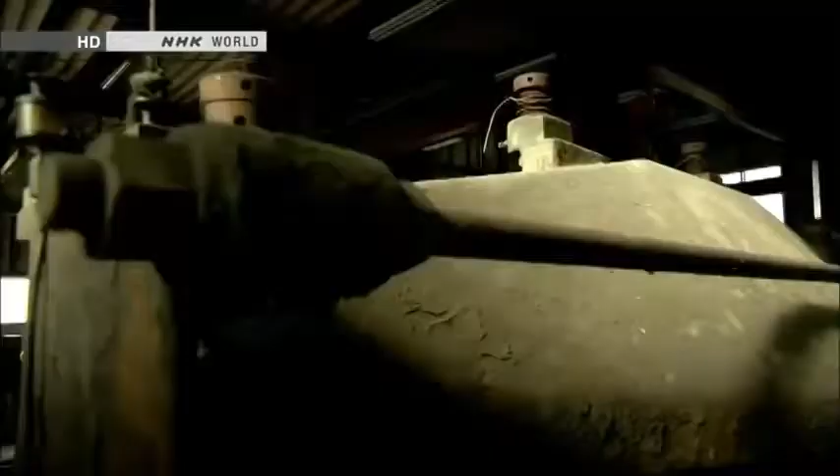In a workshop near Mount Fuji, a curious being has appeared.

It's 3.8 meters tall and weighs 4 tons. It is a giant humanoid robot named Kuratas.

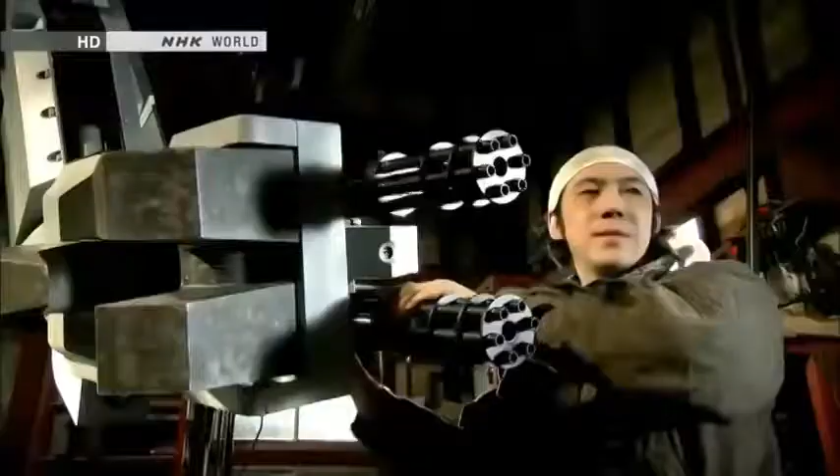Kuratas is a contemporary artist's creation. He holed up here for 2 years, building the robot with input from an expert.

He calls Kuratas a work of art, but it's a sophisticated piece of machinery. A person seated inside can control the robot, move its limbs, and grab things.

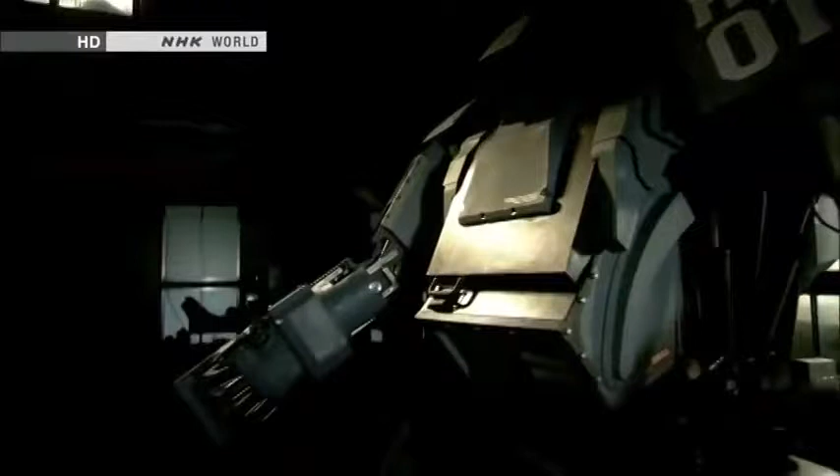The artist says he was inspired by robots in science fiction tales and animation. That vision sustained him as he worked in solitude.

Things that were once unthinkable are becoming real. How will robots evolve? Well, military applications could be one option. They'll probably become more and more like humans. They could surpass us in strength and ability.

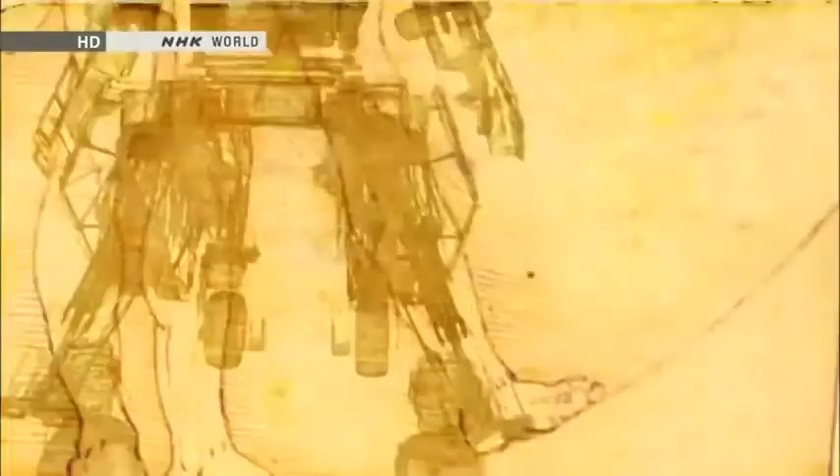People long dreamed of creating these extreme machines. Now, humanoid robots are here.

They think like we do, move like we do, and even sacrifice themselves for us.

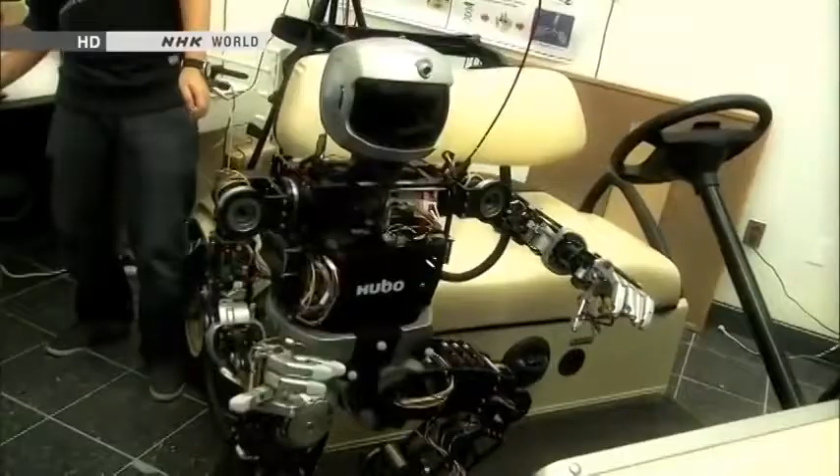We want our robot to change society, because robots must be useful. Electronics and computing, progress in vision systems, there's many pieces of it. We will see much more capability continue to grow.

Since the Industrial Revolution, people have entrusted some jobs to machines.

But there may come a day when humanoid robots do much more complex jobs. Then, what will people do?

And you'll see more and more robots doing things in society, whether it's manufacturing or service applications or home healthcare applications. The key will be skillfully dividing labor between humans and humanoid robots.

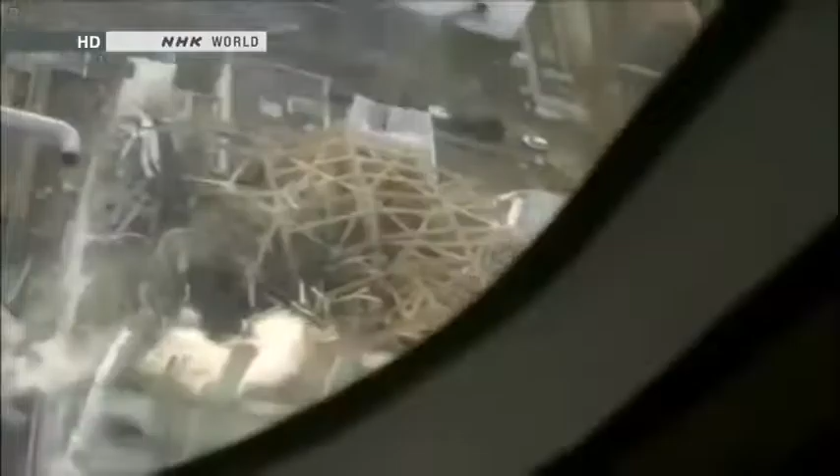The disaster that hit Japan in March 2011 accelerated efforts to develop robots with human traits. The Fukushima nuclear accident left people powerless.

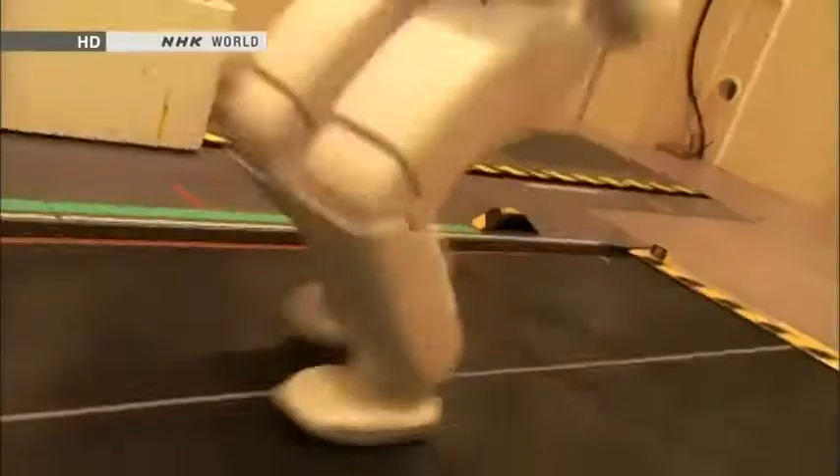Robots can take over when things become dangerous. They can plow through rubble, climb ladders, even make repairs. People are turning to humanoid robots to handle all of these tasks.

We're eager to launch it soon to end the crisis. By joining forces, we can make a truly useful contribution. Only a humanoid could do it. Or the day will come when robots will really assist mankind.

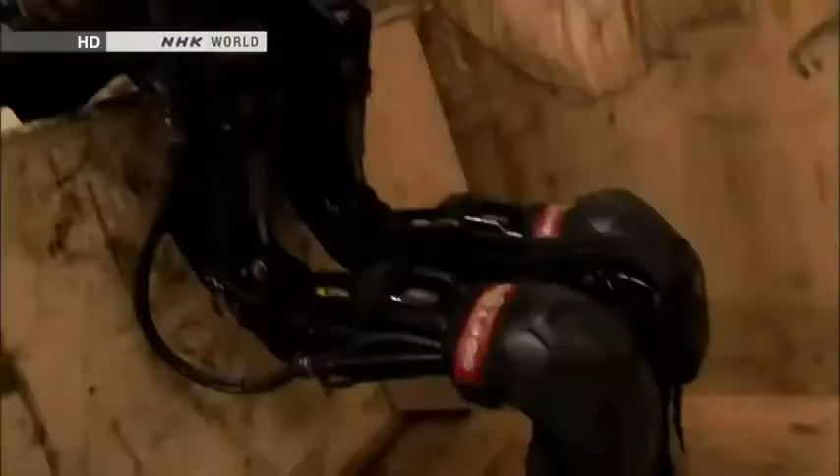The nuclear disaster in Japan sparked explosive advances in humanoids at the front line of robotics development. This program explores the future that's fast approaching.

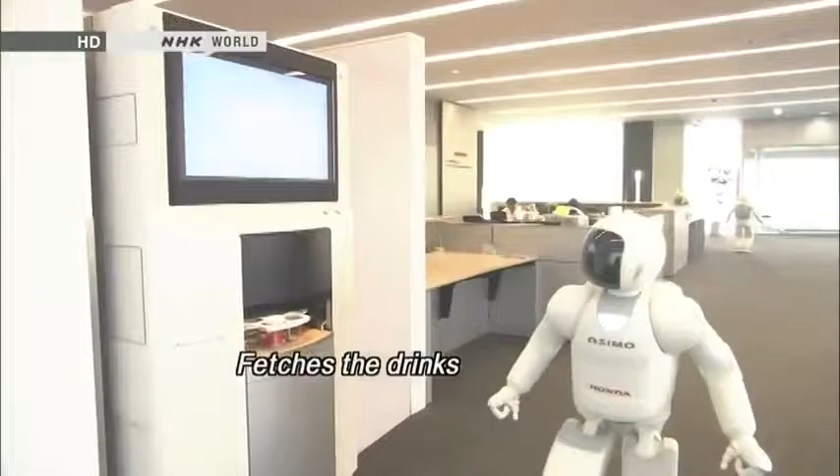ASIMO was created by Honda's research and development subsidiary. We were allowed to film their top-secret robotics laboratory.

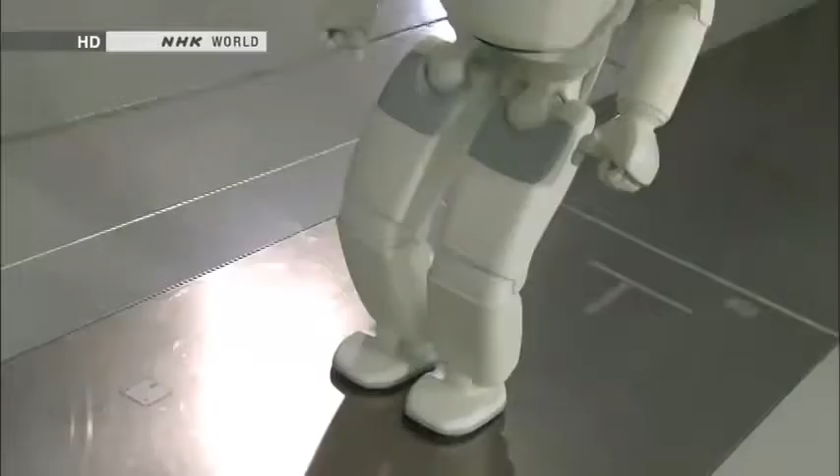Japan is a worldwide leader in the development of humanoid robots. ASIMO is the country's crowning achievement. Engineers continue to make improvements.

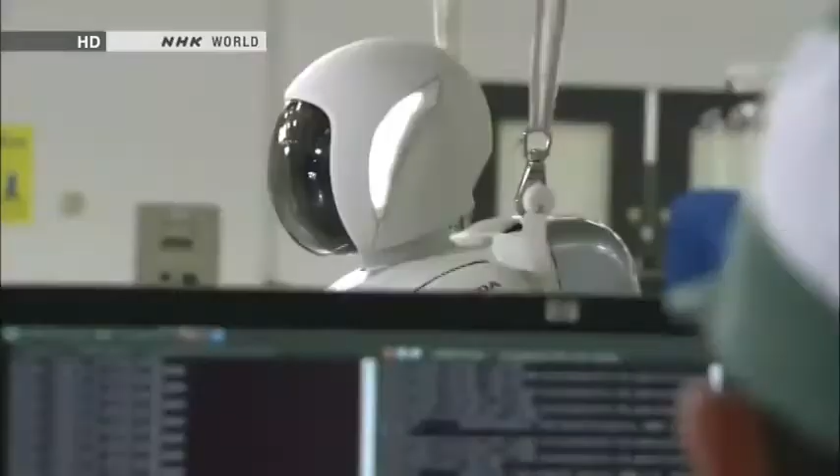ASIMO's most innovative feature is its advanced intelligence. The robot can think and act on its own without human intervention. That's made possible by sensors that replicate our 5 senses.

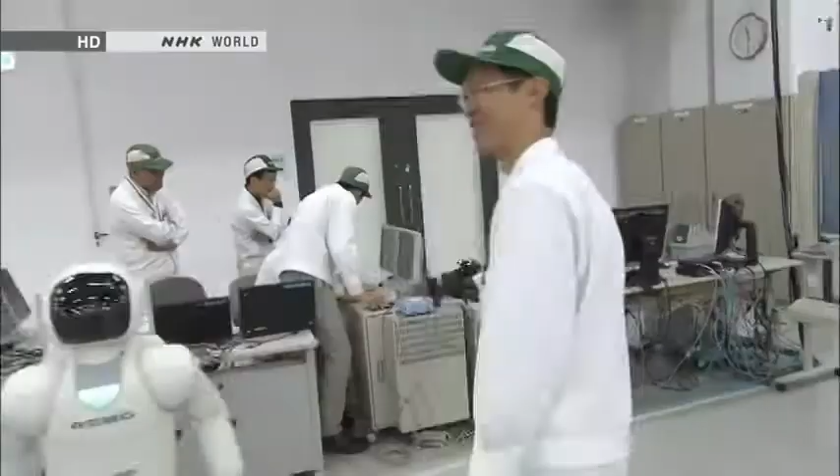ASIMO's head contains 8 microphones. It uses them to listen and engage in conversation. 2 cameras work as eyes. They can detect humans and use stored data to identify them.

A facial recognition problem? I don't think so. Please cover your face.

ASIMO's artificial intelligence analyzes a vast array of information. That's how it understands people's requests and takes appropriate actions.

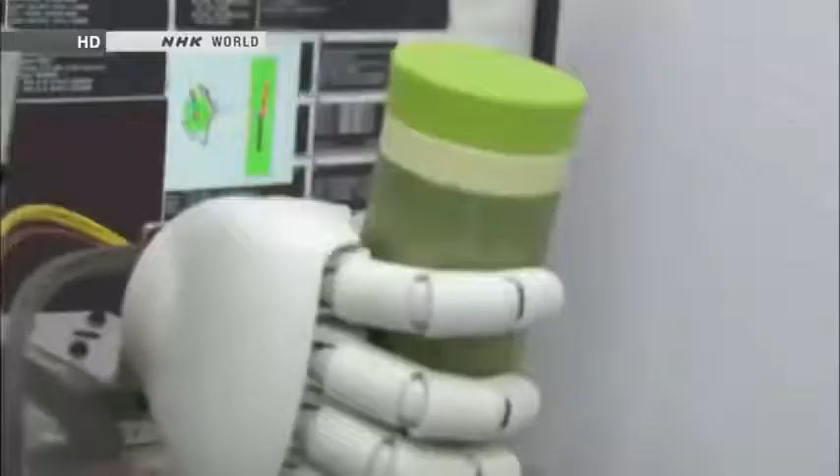ASIMO also has a sophisticated sense of touch. Its fingers can make subtle movements, like a person's. Sensors are embedded in the fingertips, too. They can gauge the hardness of an object, like human fingers do.

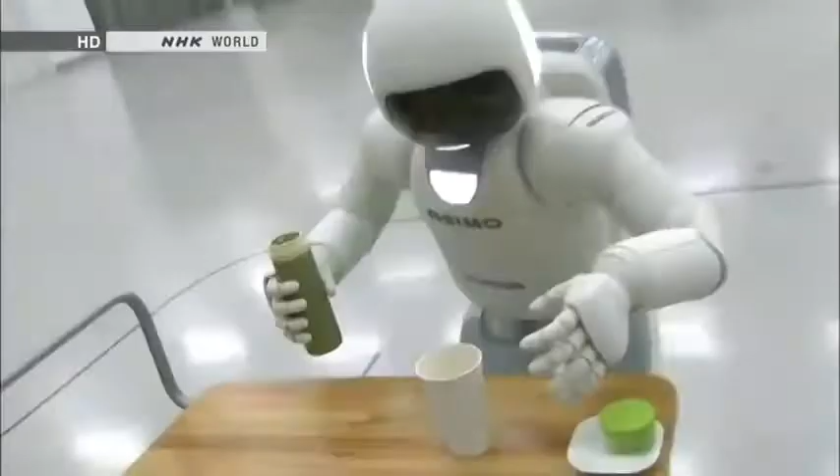Most robots use a fixed amount of strength to grab things. But ASIMO exerts more power to open a tightly sealed water bottle and less when holding a paper cup.

Its artificial intelligence uses information from the fingertip sensors to adjust the grip.

The developer's ultimate goal is for ASIMO to be a valuable partner that coexists with humans.

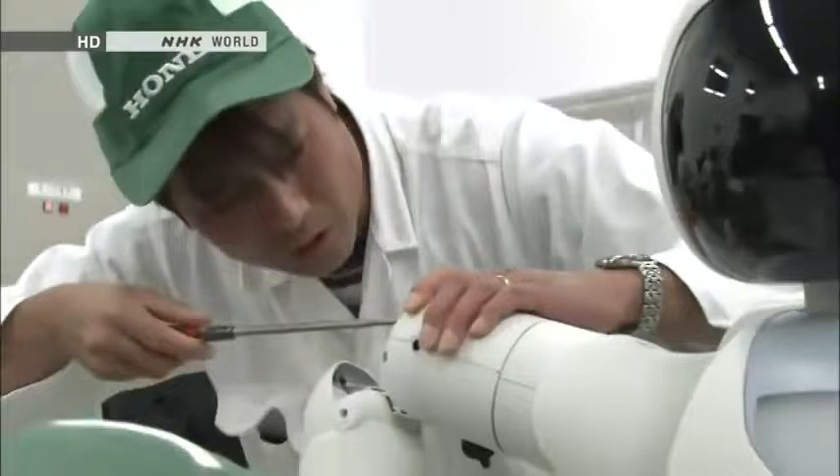The engineers who created ASIMO all grew up watching animated shows about robots, such as Astro Boy, Doraemon, and Gundam. They dreamed of someday making their own.

Satoshi Shigemi is the development team's leader. He has been designing robots for the past 16 years.

From the beginning, we wanted to design a robot that could help people. To realize that dream, we're constantly asking ourselves what kind of robot would be able to change society, make people happy, and make life easier for people around the world.

Our idea is to create a robot that will change how people live. We're working through the technological issues one by one in order to reach that goal.

ASIMO's advanced physical capabilities are revolutionary. The robot can walk and run. It can reach speeds of up to 9 kilometers an hour.

For robots, walking is much easier than running. When running, both feet momentarily leave the ground. Balancing in mid-air is no easy task.

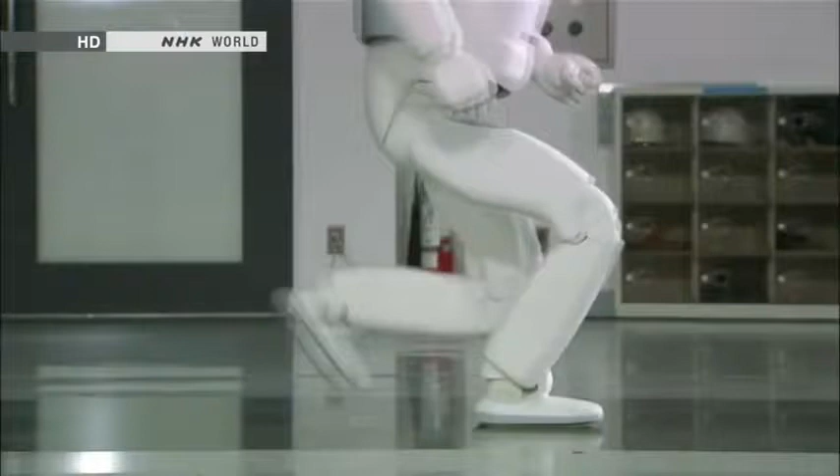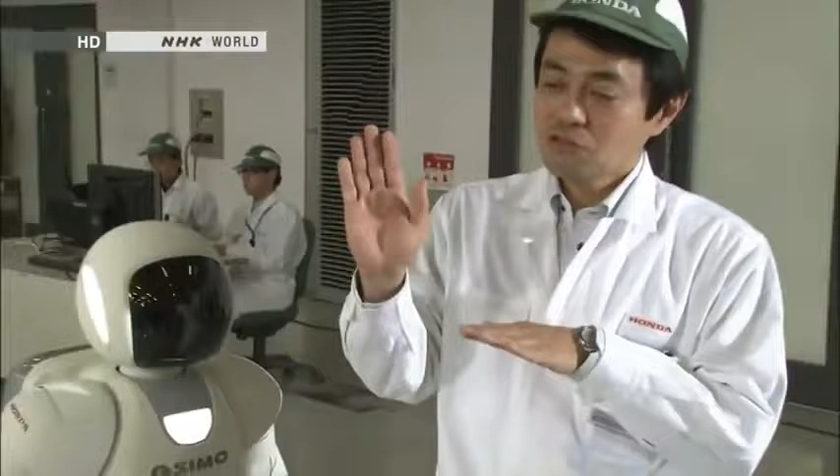Maintaining posture while jumping or floating in the air was a major technological breakthrough. ASIMO leans its upper body slightly forward to maintain overall balance, and goes forward straight in the air.

Sensors in ASIMO's waist measure the robot's angle. It leans slightly to compensate, forward or back, side to side. That's how it stays perfectly balanced in the air.

ASIMO has been evolving ever since development began in 1986, much like a growing child. But something happened that made researchers realize ASIMO's real-world limitations.

It was the accident at Tokyo Electric Power Company's Fukushima Daiichi nuclear plant. The damaged reactors released radioactive substances, making it difficult for humans to deal with the crisis. People needed something that could confront the dangers and bring the plant under control.

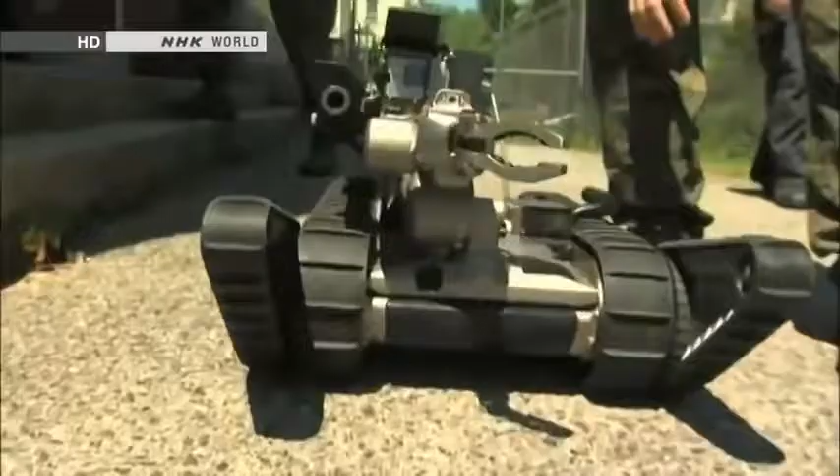Robots. Japanese officials sent a request for robots developed by the U.S. military. The robots were sent to Fukushima in April 2011. They recorded images inside the damaged reactors.

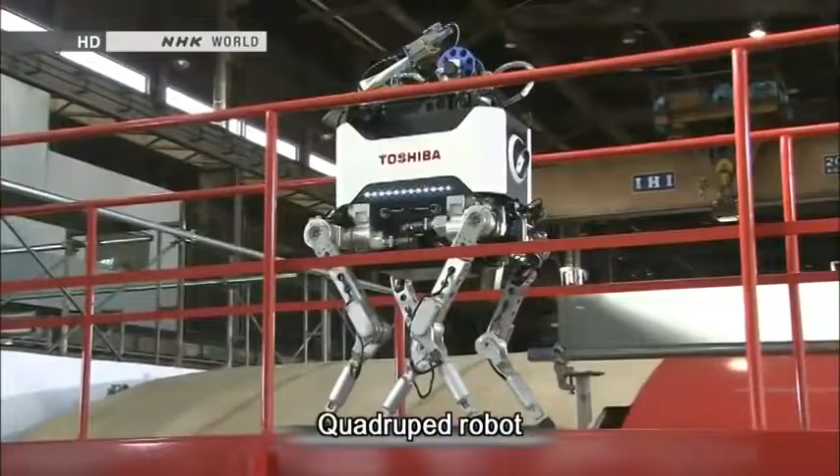Since then, a variety of Japanese robots have been enlisted as well. Robots have proven to be useful, but 2 years after the accident, they're only used for inspections. They're not able to do all the work of humans.

What about ASIMO? Right after the disaster, people flooded Honda with phone calls and emails asking the company to send ASIMO to the Fukushima plant.

But ASIMO wasn't up to the task. It could move nimbly over an office floor and other flat surfaces, but large vertical gaps and obstacles were a different story.

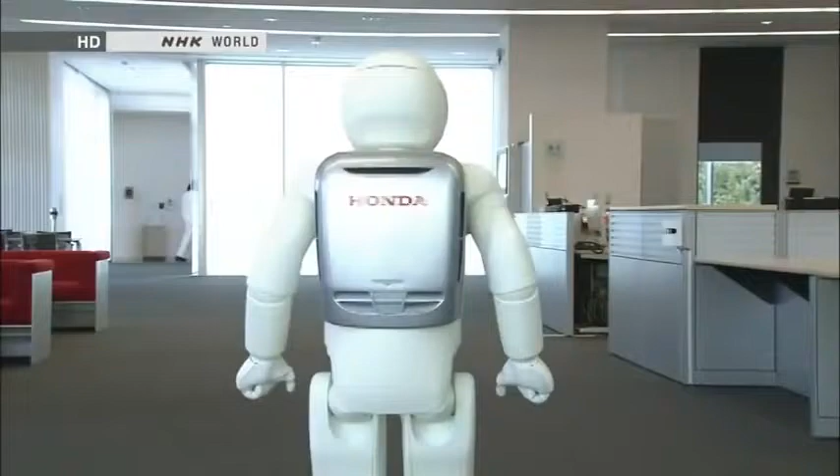We heard from many customers. We ourselves regretted that ASIMO couldn't be of help. It was obvious that the ASIMO we had built wasn't ready for real-life action.

We realized right away that we needed to make something different. Something new that could offer immediate assistance.

Honda wasted no time. Company officials offered to create a robot free of charge to assist TEPCO in the recovery. TEPCO accepted. Officials asked for a robot that could open or close valves inside the nuclear plant.

We wanted to flush out radioactive materials that remained inside the pipes and bring down radiation levels in the facility. That was our first goal.

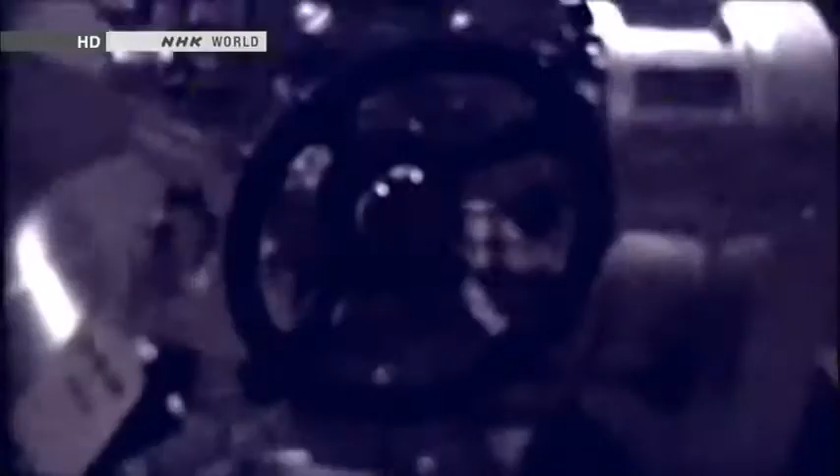Unless we opened or closed the valves, the area would remain highly radioactive, and that would prevent workers from entering the facility, and impact the entire decommissioning schedule.

How many valves are there? Each unit has from several thousand to tens of thousands of them.

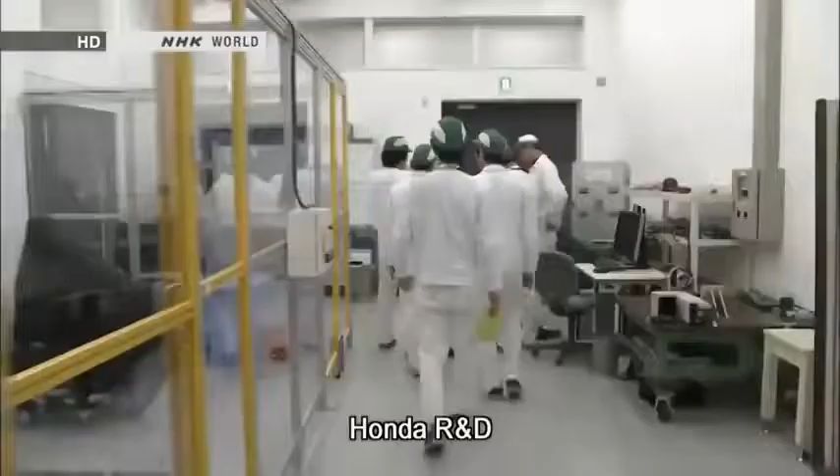In July 2011, 4 months after the accident, Honda began designing a robot for use at the nuclear plant. Members of the ASIMO team were put in charge of the project. A humanoid robot would take too long to build, so engineers focused on making a robot specifically for operating valves.

ASIMO was crucial to their efforts. Its ankles employ advanced balancing technology. Developers reasoned that using it would allow the new robot to work inside rubble-filled reactor buildings.

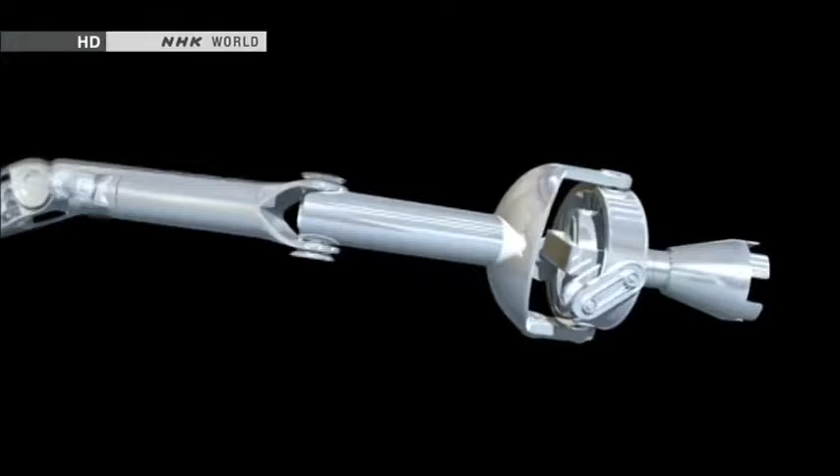The team worked exceptionally fast, completing a prototype in just 4 months. They turned ASIMO's leg into an arm for operating the valves. Even when the base moves, the arm remains steady.

So far, so good. Officials from TEPCO evaluated the prototype at the National Institute of Advanced Industrial Science and Technology. The government-backed group for cutting-edge research contributed to the development effort.

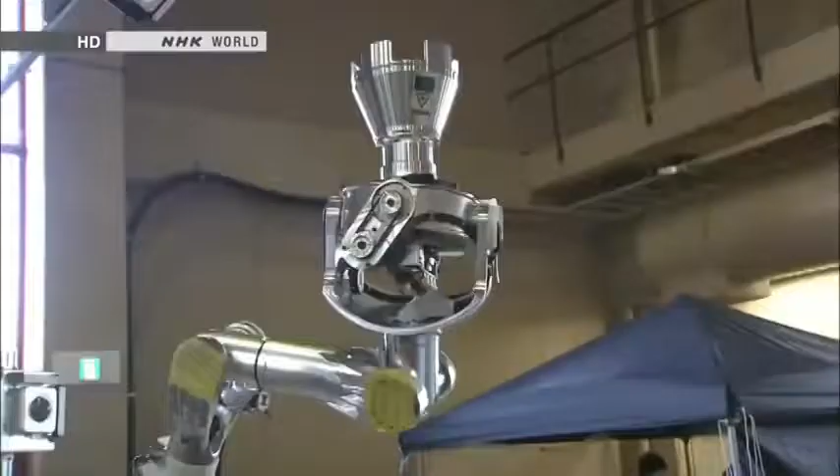A TEPCO official couldn't take his eyes off the robot's movements. We may be quite demanding. That's okay. We might be quite direct. The test is designed to replicate conditions inside the nuclear plant.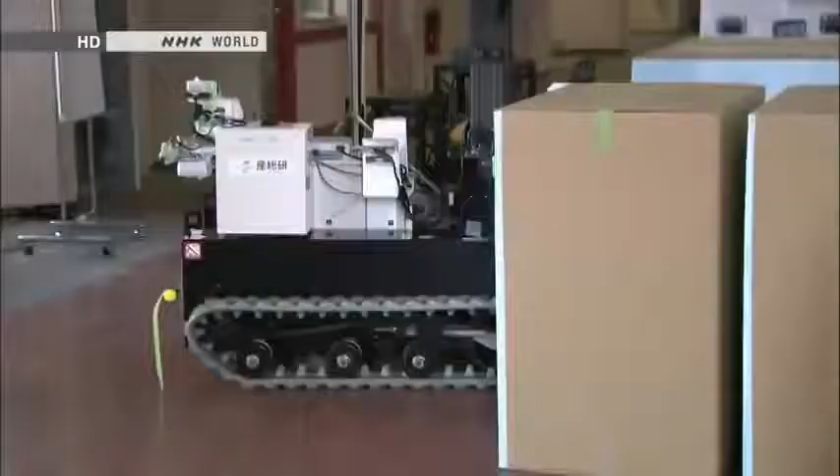The robotic arm is remote controlled. Testers send the arm toward one of the valves. There are a number of unknowns, including the condition of the valves. They may have rusted since the accident. A valve might break if the robot applies too much force, or it might not budge at all.

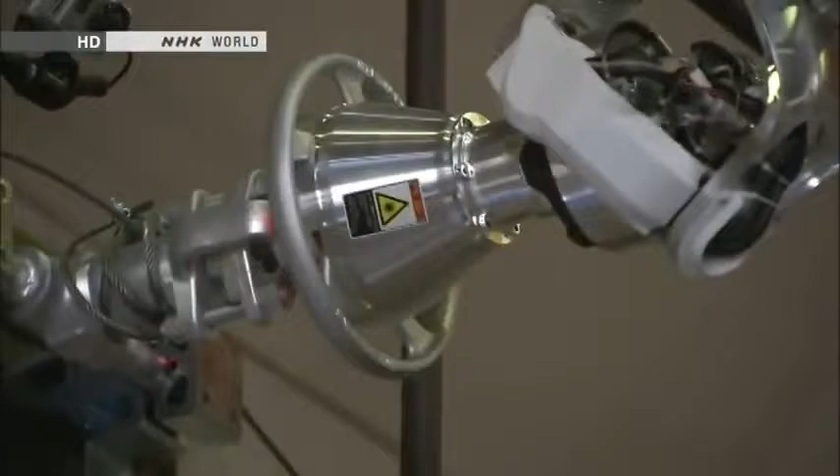The robot uses just the right amount of force and turns the valve on the first try. It's passed the test. This robot can do more than inspections. It could help in the recovery effort.

From what we've seen, the robot seems near perfect. We want to use it as soon as the need arises. It's important that we quickly do what we can to make that possible.

The Fukushima accident also encouraged U.S. developers to design emergency response robots. Department of Defense officials have spearheaded the effort. Before, they had shown little interest in humanoid robots. Now, they view them as vital for disaster response.

The architect of the new strategy is Gill Pratt of DARPA. He oversees funding for leading-edge research at the Department of Defense.

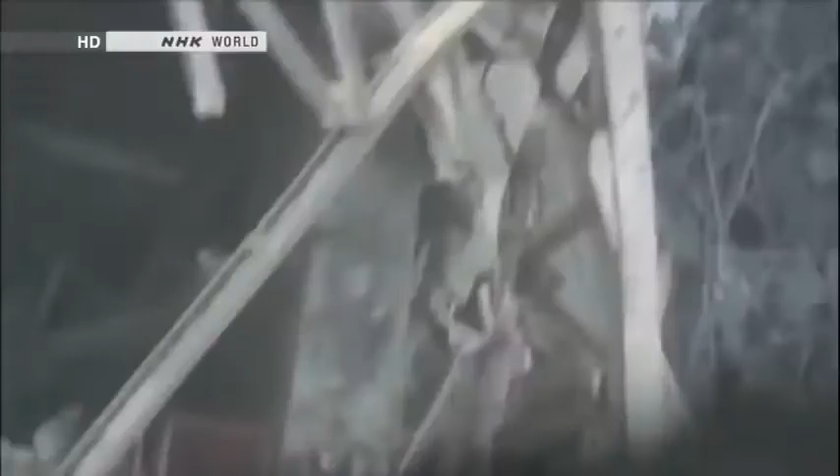There are many aspects of disaster response in Fukushima that inspire people in robotics to work on new capabilities. If they were able to take action during those first 24 hours, then the first reactor maybe would not have blown up, in an environment too dangerous for a person to work in. What's important to us is that the robot is compatible with human environments, compatible with human tools, and compatible with human operators without special training. As a result, the easiest form that comes to mind is the human form.

DARPA is backing the development of a humanoid robot for catastrophes, such as nuclear power plant accidents.

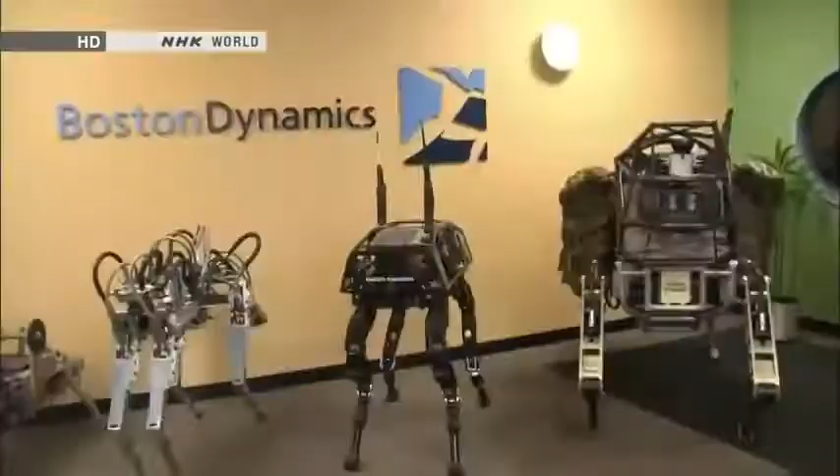This company is leading the development work. It has already built several military robots. This is the first American-made humanoid robot for disaster response. It's called Atlas. Before, U.S. designers had focused on robots with specialized functions.

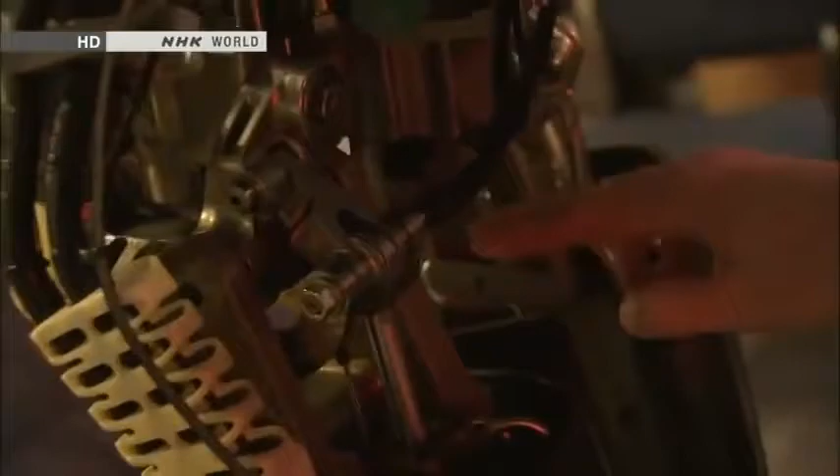Why the sudden interest in humanoid robots? Traveling over debris, prying open valves, using tools for repairs — performing multiple tasks like these is impossible for specialized robots. Crises also require robots that can navigate doors and stairs. Humanoid robots are ideally suited for such situations.

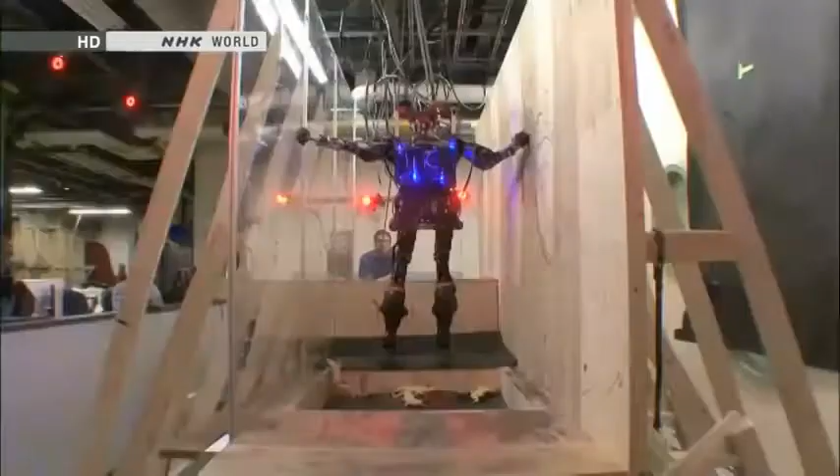Tests of this prototype were going smoothly. It can easily climb stairs and jump from a height of nearly a meter. It can negotiate obstacles using its arms and legs. It can already handle more demanding environments than Asimo can.

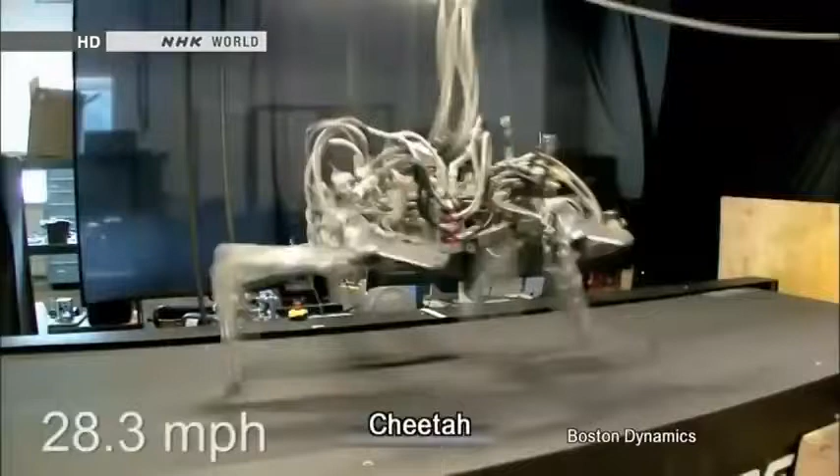Atlas is loaded with technologies originally designed for military robots. A quadruped robot called Cheetah can race through a battlefield at 45 kilometers an hour. LS-3 is for transport — it can carry heavy supplies for soldiers.

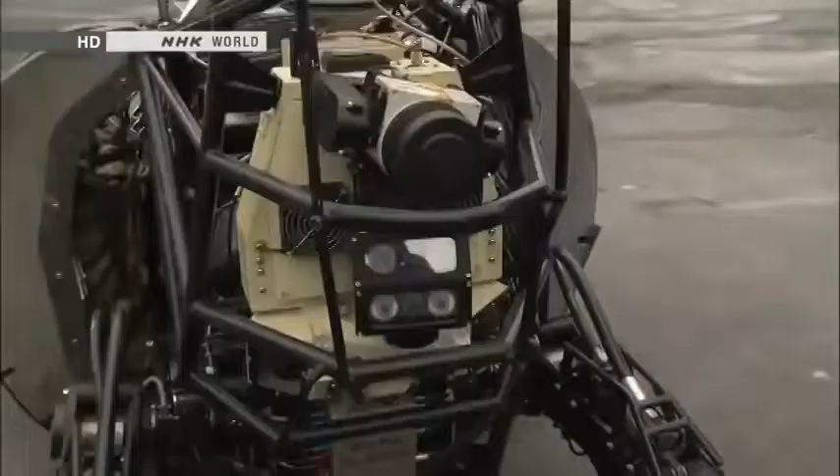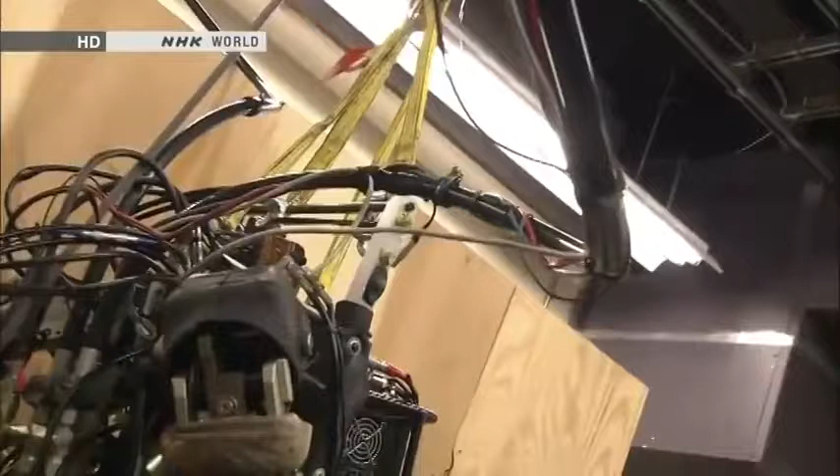The ferocious-looking robot gets its strength from a powerful hydraulic drive system. A hydraulic device can be small, yet quite strong. The black cables convey hydraulic power to the legs, generating the brute force required for harsh battlefield conditions. A web of hydraulic cables covers Atlas's body, forming a muscular suit of armor for clearing debris.

Another important technology comes from military robot engineering. This machine's joints have a wide range of motion, allowing flexibility that humans can't achieve. Atlas's joints are capable of moving in 28 different ways. Atlas can crawl through narrow spaces and withstand sudden shocks.

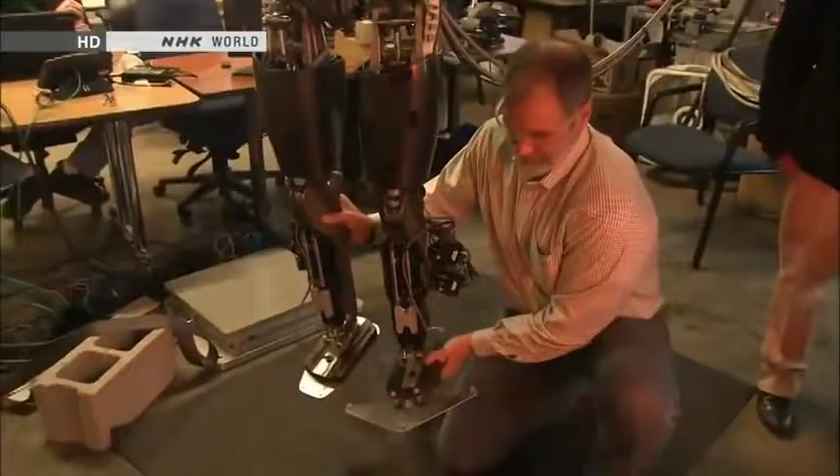But then we have the knee. This has 3 degrees of freedom in the hip, just like us — this way, and then this way. I am very impressed with the number of degrees of freedom. It will be able to do these human-compatible tasks without a lot of the limitations other robots have.

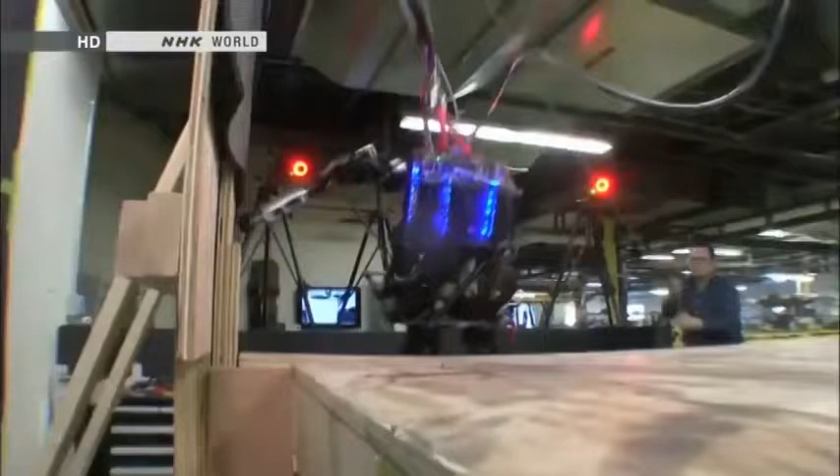Engineers will combine Atlas's rugged body with sophisticated artificial intelligence that's almost near completion. They aim to complete the robot by December of next year.

One reason you see humanoid robots is because some people are really interested in robots as an entertainment thing, or as a performance thing. I think that's different — we're much more interested in basic capabilities for emergency response and rescue. So I don't think Asimo has been designed to do those things yet.

U.S. engineers stepped up their efforts to develop humanoid robots after the nuclear accident in Japan. Japanese researchers are embracing the same mission.

In November 2012, robot engineers from around the world gathered in Osaka for an international conference on humanoids. Gill Pratt from DARPA was one of the participants. He came to invite engineers to join a project sponsored by the U.S. Defense Department.

March 11th — after 24 hours, if only a robot had been there to go and open that valve, the entire disaster could have been averted. But we didn't have one, and furthermore we didn't have anyone that could do the job. So shortly afterwards, we actually started planning the DARPA Robotics Challenge.

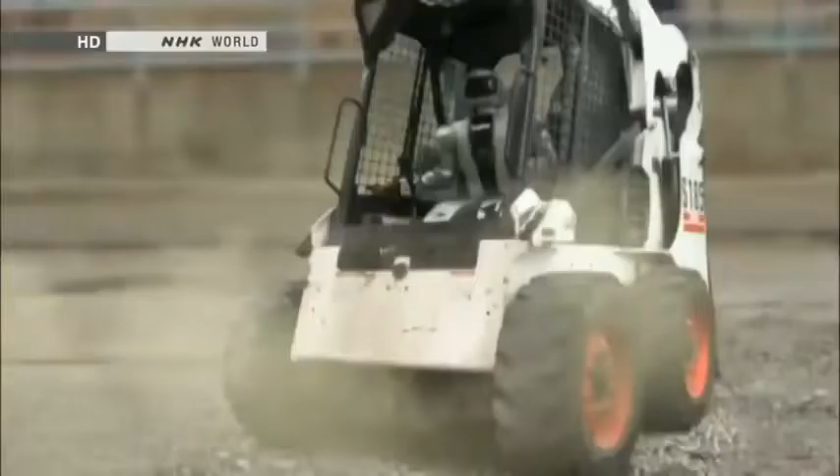The challenge consists of 8 tasks: driving a vehicle to approach a disaster site, walking over rubble, removing obstacles, opening doors, using tools to break down walls, climbing ladders, turning valves, and making repairs. A single robot must complete all 8 tasks.

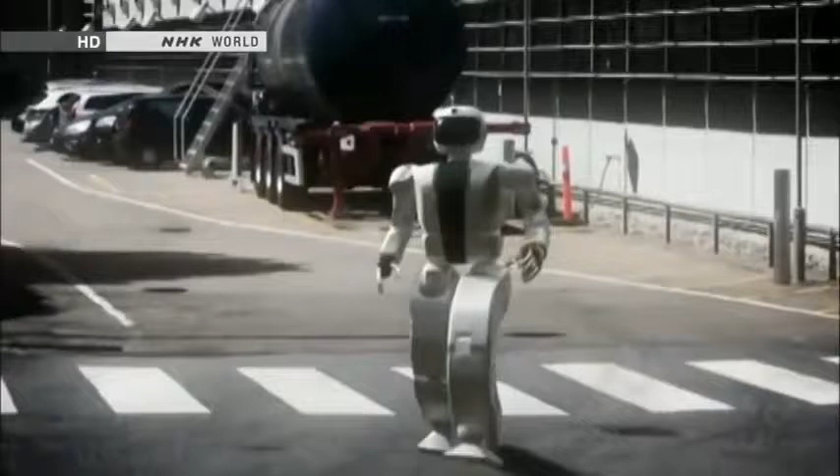The development period is 2 years. DARPA will provide contestants with funding of up to $4 million. DARPA has received over 100 proposals from research groups worldwide, including renowned organizations like NASA and MIT.

Japan is at the forefront of humanoid robotics engineering, yet its researchers hesitated to throw their hats into the ring.

So actually, to me, it's difficult not to see that some of the results of the DRC could be used to advance, as you say, advanced military technology. The DRC is about developing robots that I believe wholeheartedly are completely impractical for offensive military purposes. Will the technology we come up with find its way into military systems? Probably yes. But I guarantee you that if you work on a robot for healthcare, there's a chance that technology will also find its way into military systems.

The members of one Japanese research institution wanted to take part in the competition.

They worked at the University of Tokyo's robotics lab. Researchers there, along with those at Honda, are global leaders in robotics engineering. But they faced a major obstacle to competing: the university bans military-funded research.

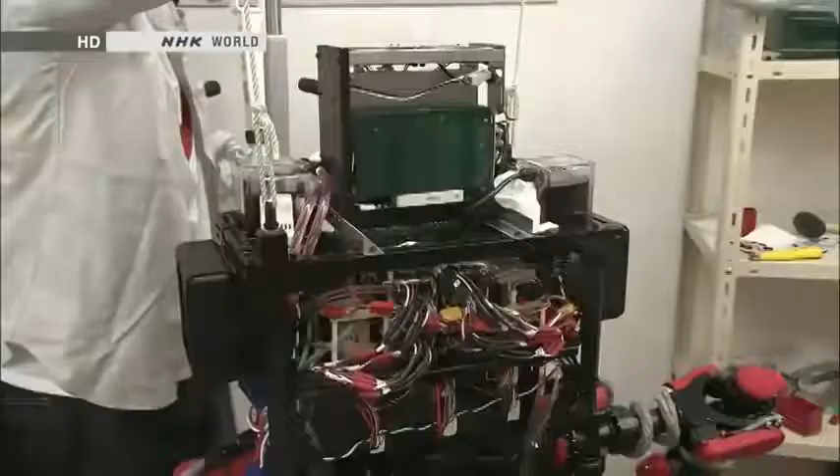Three researchers made a decision. They told the university they were leaving. Then they decided to set up a venture company and enter the DARPA Robotics Challenge. They couldn't shake the feeling that they should leave their quiet university lab and help resolve the nuclear crisis.

Six months after launching their venture, the team had just completed a prototype with help from university graduates. Its long arms can exert 10 times more force than those of conventional humanoid robots.

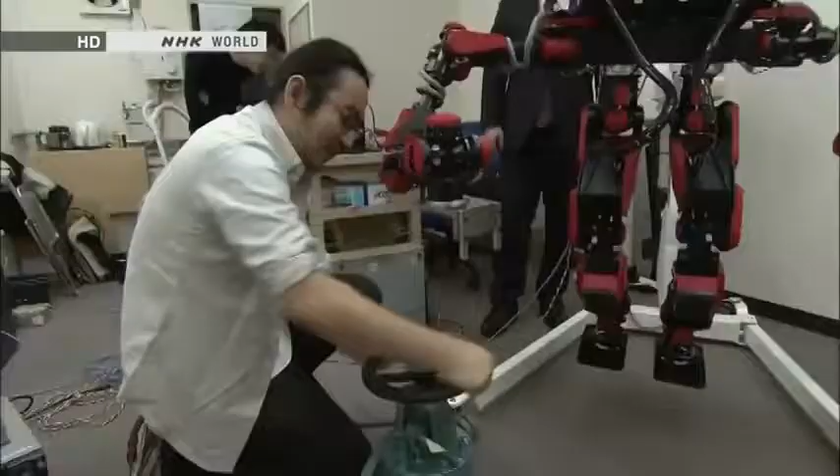It's too tight to turn with one hand. It can easily turn a valve that's too tight for a person to turn. The strong force comes from a large electric current that pushes the motors to their maximum limits.

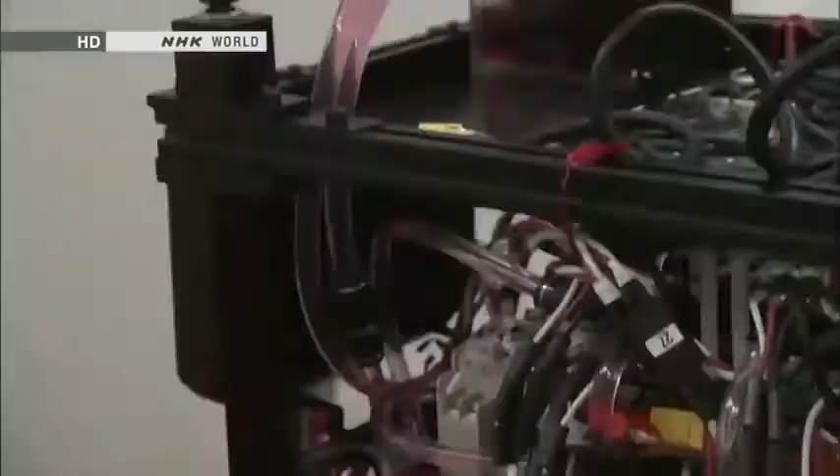A reddish fluid circulates through the robot's body. The fluid serves as a coolant that keeps the motors from overheating. The cooling system should enable the robot to perform hours of grueling work at disaster sites.

The time has now come for the developers to apply their years of research to the real world. A nuclear crisis has happened here in Japan. Radiation is escaping. Researchers in every field must wonder at least once if the technology they've been working on could help resolve the crisis. By joining forces, we can make a truly useful contribution. It's with this in mind that we decided to enter the competition.

One country is quickly catching up with Japan in humanoid robotics: South Korea. KAIST is a government-funded lab for the advancement of science and technology. Researchers there were among the first to express interest in DARPA's Robotics Challenge.

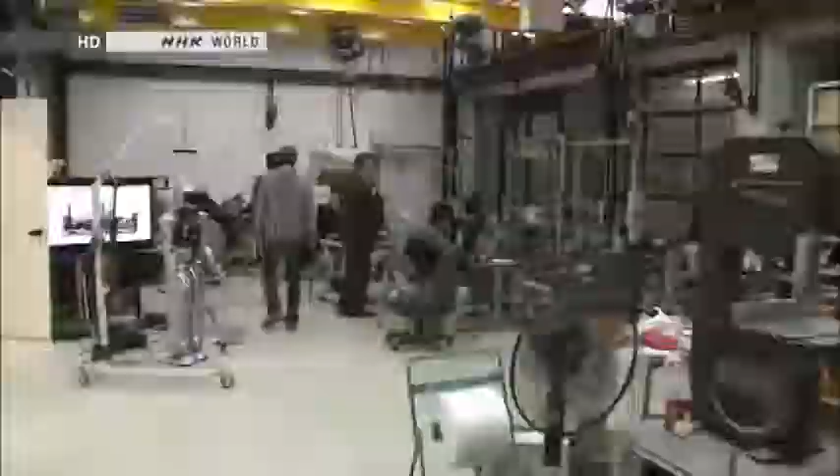This humanoid robot is called Hubo. It's modeled on Asimo, which Honda spent 14 years developing. Hubo was built in just 5 years. Hubo deftly manipulates its hands, and it's also good at dancing. Its moves look just like Asimo's.

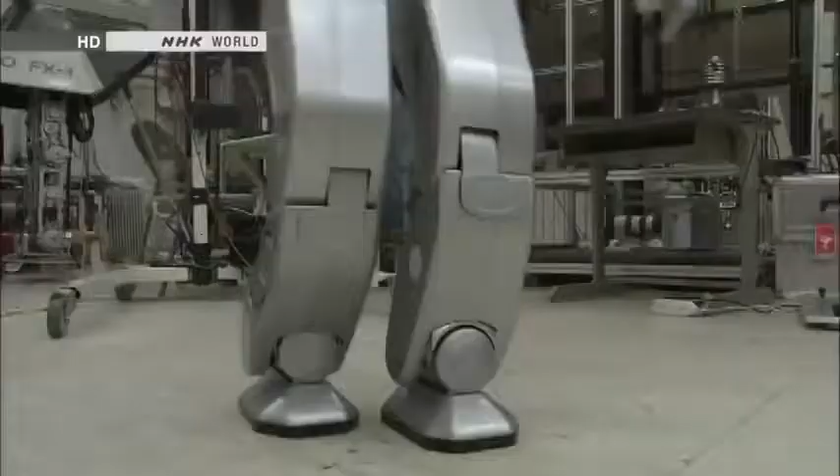Hubo has been undergoing a major upgrade ahead of the competition. It can now bend backward at the waist while walking to handle all kinds of environments. It can quickly pick up tools. The tests were going well.

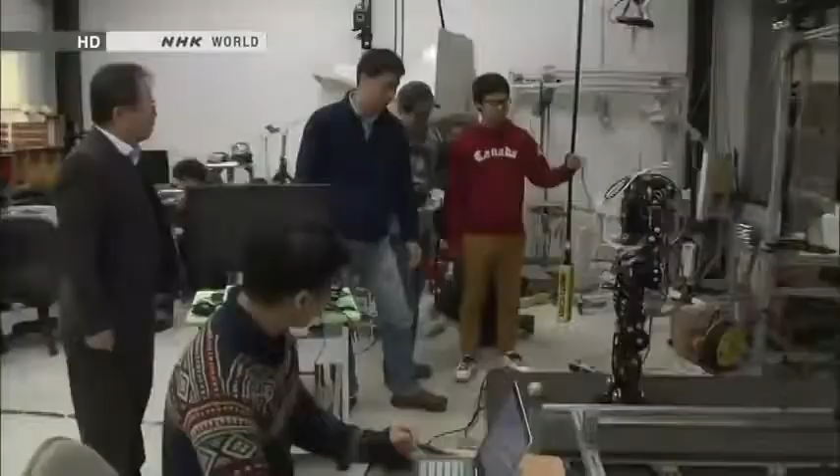People have always compared Hubo to Asimo. Engineers now had a strategy to get ahead of the Japanese developers. They decided to publish certain details about Hubo's design and pursue joint development with researchers at other institutions. One could say that this space inside Hubo's chest captures the heart of their thinking.

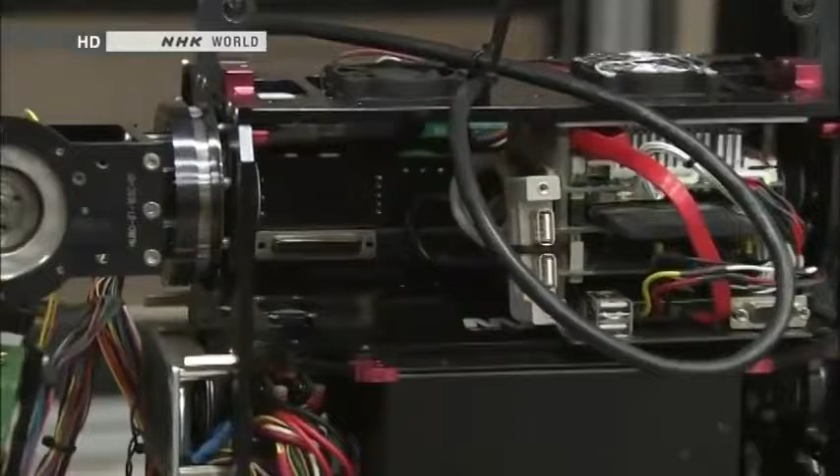It's empty now, but this is where artificial intelligence will be installed. It's removable. Hubo does not yet possess artificial intelligence. Its motions are as sophisticated as Asimo's, but Hubo's movements are all pre-programmed.

U.S. universities that lead research into artificial intelligence will develop a brain for Hubo. The stage has been set for a joint U.S.-South Korean team to compete in the DARPA Robotics Challenge.

Sharing is the key to making technological advancements. That's true in South Korea and in other places too. Research shouldn't be confined to one place. People developing humanoid robots elsewhere are too close-minded.

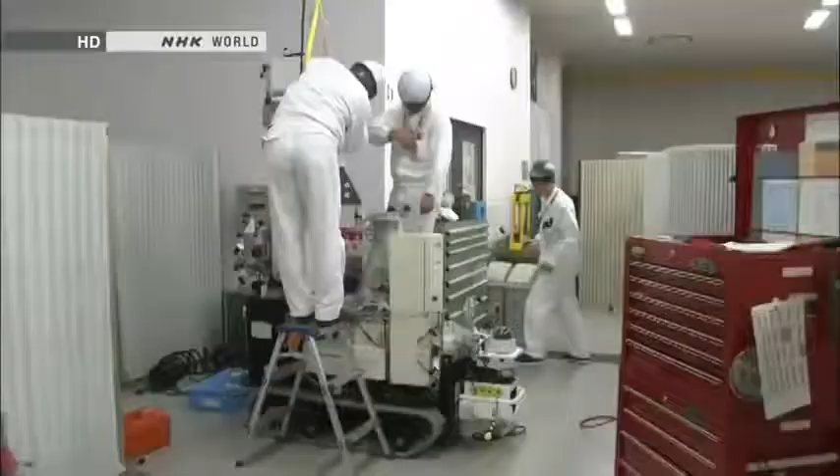Researchers at Honda were also invited to enter DARPA's competition, but they declined. Their energies were focused on designing a robot to tackle Japan's nuclear crisis.

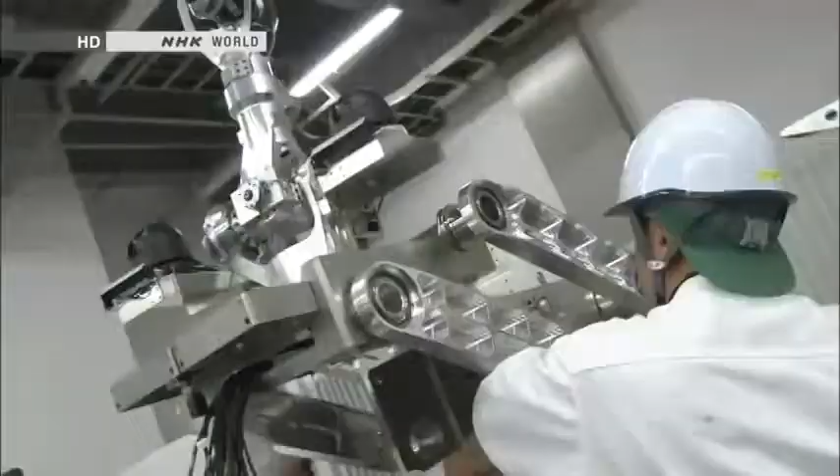Nearly a year has passed since Honda's robotic arm passed evaluation tests, but the device has yet to be deployed to the nuclear disaster site. That's because officials at TEPCO requested a change in specifications. Engineers have replaced the valve-turning hand at the end of the arm with a camera.

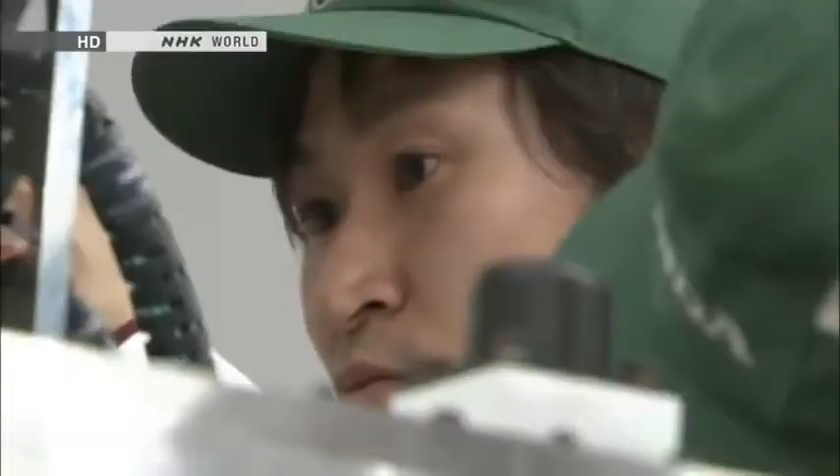TEPCO had changed its plan. Officials decided to put priority on assessing conditions inside the plant's facilities. They said it was too early to have robots work on valves. There wasn't even a recovery plan in place when we were working out the valve manipulation tasks.

Confusion also prevailed at the site. We were expecting valve work to begin 2 to 3 years after the disaster, but the timing has ended up being later than what we'd assumed one month into the crisis.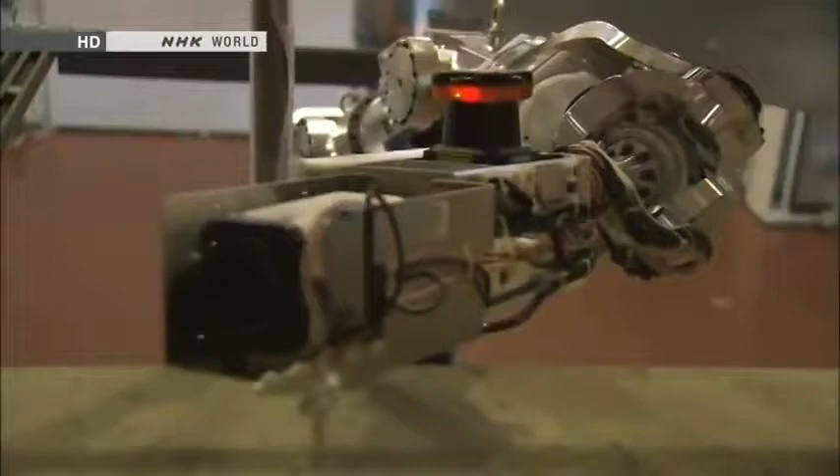The robotic arm will soon be sent to the accident site. It will provide the first images filmed from high up. The robotic arm was not the end of Honda's efforts. Its engineers had another secret mission.

They would develop a new humanoid robot, an updated version of Asimo for use in disasters. The site where the Fukushima disaster took place is dark and off-limits to humans. Only a humanoid robot with both intelligence and motor skills could climb over the debris, get to the accident site, and perform the work of people. In other words, a robot like Asimo.

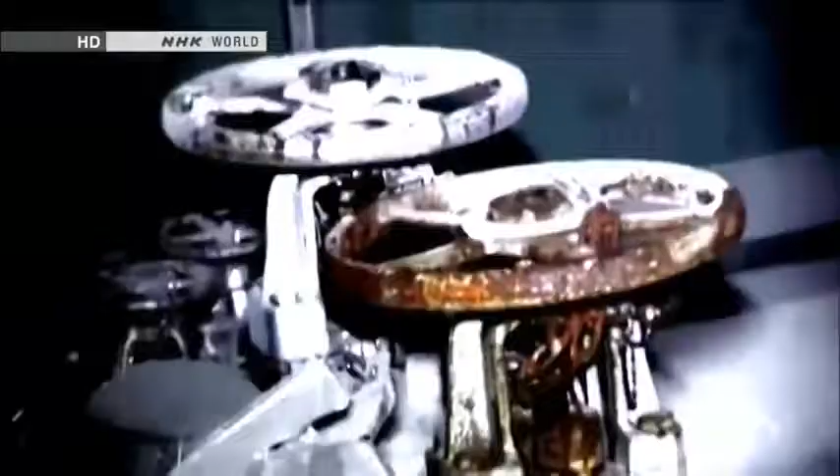Let's use our skills to make a humanoid robot that can tackle disasters. Asimo's engineers were united by this idea. The robot they envisioned would not only walk, but also use its arms to crawl, using every means possible to reach its destination. A dramatic update would be necessary.

A disaster reduction robot would be useless if it couldn't get to the site. It's important to get to the scene no matter what. Disasters create all kinds of debris that crumbles easily or breaks when stepped on. It's because it's dangerous that robots replace humans. That's what makes them valuable. A robot that couldn't get to the scene would be totally useless.

Honda's engineers began developing robots in 1986 with the goal of making people happy. 27 years of research is now being put to the test. As we saw in the Fukushima Daiichi crisis, the bottom line is that robots can stand in for humans in places that we can't go to or that are too dangerous. I am committed to delivering what's needed, when needed, in the shortest amount of time.

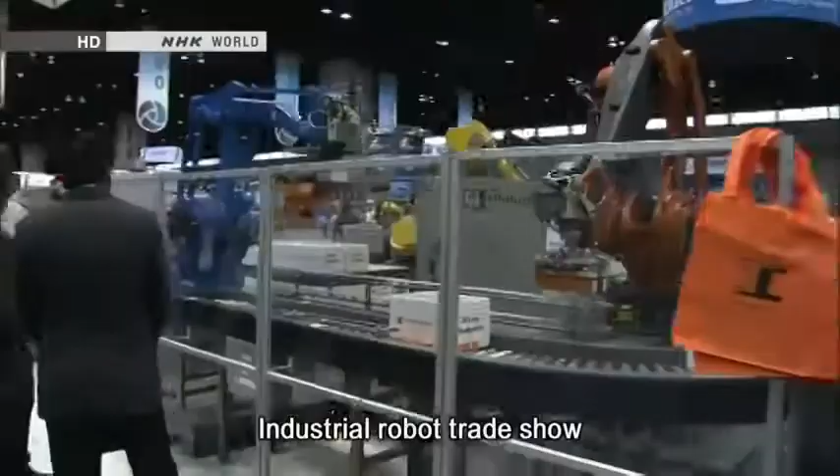One of the largest trade fairs featuring industrial robots took place in January. Global manufacturers displayed their latest models. Companies are developing more and more two-armed humanoids for industrial use. One new product at the event caught a lot of people's attention.

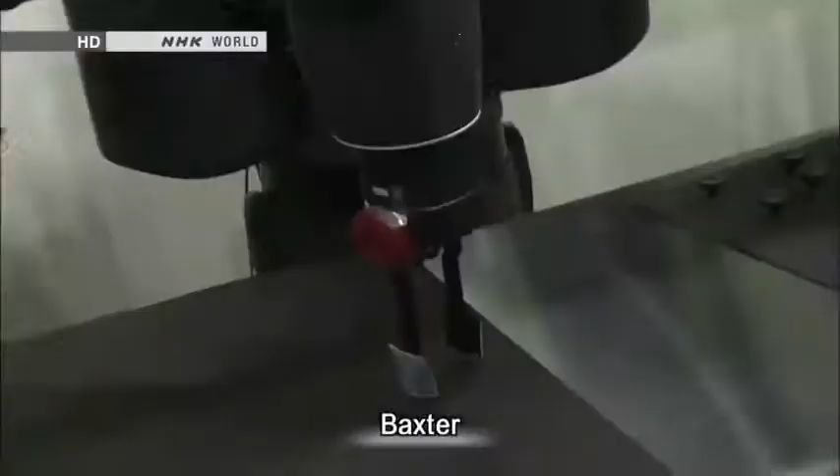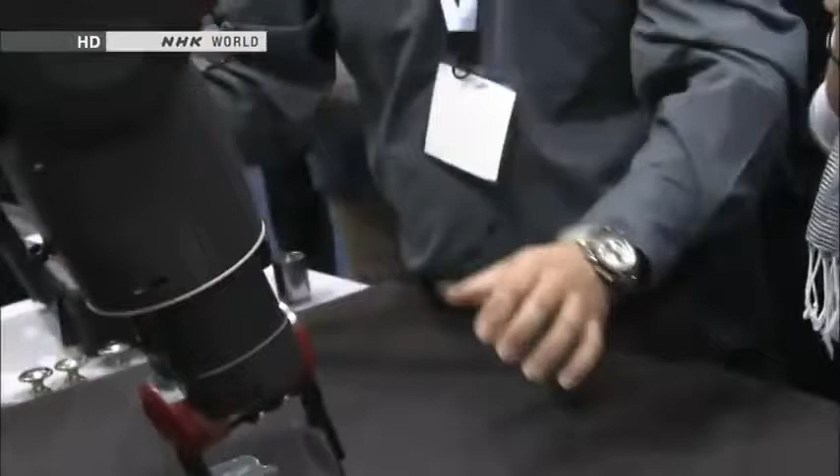Baxter was created by the inventor of a best-selling cleaning robot. It's equipped with sophisticated artificial intelligence and is designed to work side by side with people in factories and other settings. The robot's most unusual feature is its ability to master a task in a matter of 5 minutes. All that's required is step-by-step manual instruction. No complicated programming is needed.

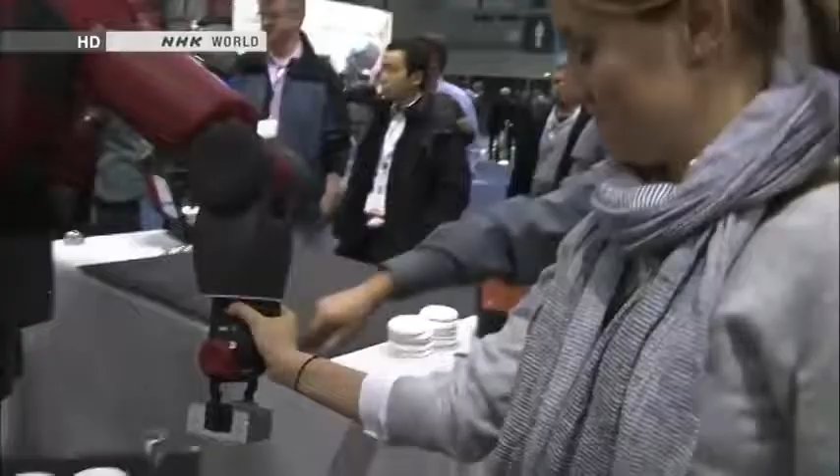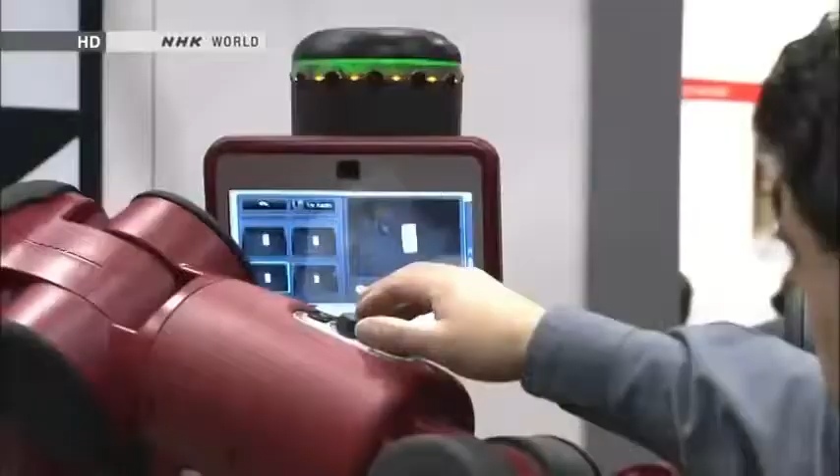The expression on the face on the LCD screen shows whether or not the robot has understood the task.

Baxter costs $22,000, a bargain for a humanoid robot. The maker says buyers can recoup their investment in several months and slash labor costs. I'm very impressed with it. I work for a small manufacturing company, and we have some older employees who are looking to retire. There's some tasks that Baxter could do for us very effectively. Plus, it would be cheaper than employing a person. It's not going to get tired, it's not going to need to stop. It'll keep running while everybody else is taking their lunch.

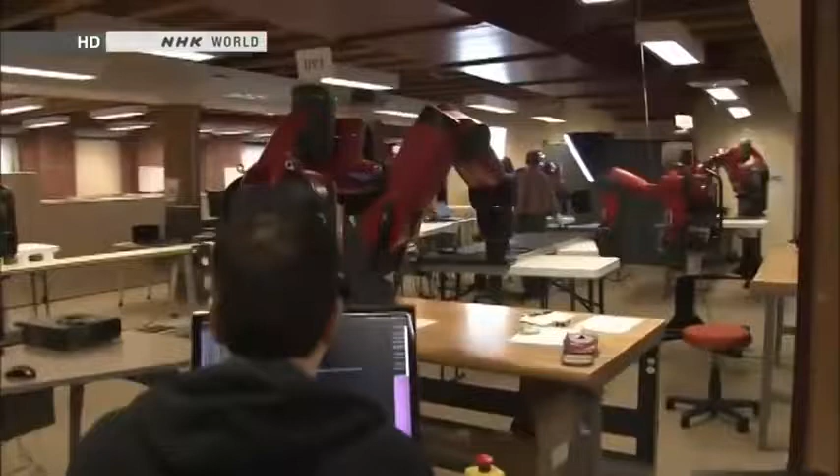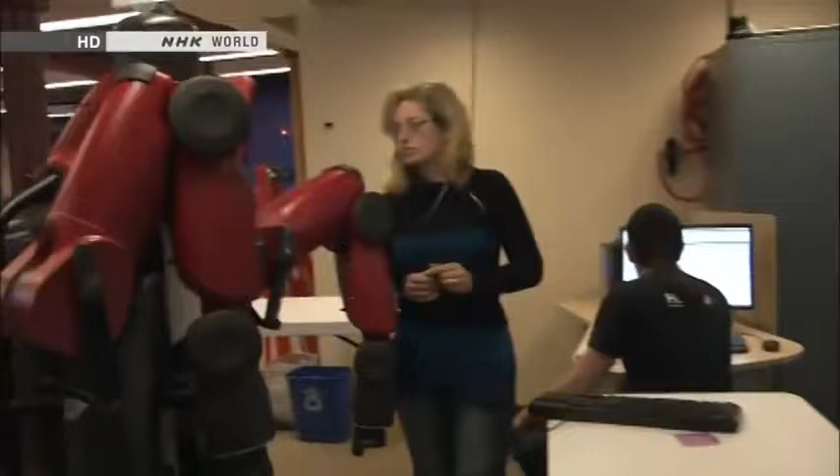The Boston-based manufacturer has a flood of back orders. Officials say someday Baxter will work at places like coffee shops, taking orders and grilling burgers. Eventually, they expect to have 500,000 U.S. customers.

Today we're focused on manufacturing, and there's a very big opportunity in manufacturing, but there's lots of other places that a robot like Baxter could go. We had the Industrial Revolution at the turn of the last century. We've just gone through the computer revolution, effectively at the turn of the most recent end of the century. We're now into the robot revolution.

Will people and robots someday compete for jobs?

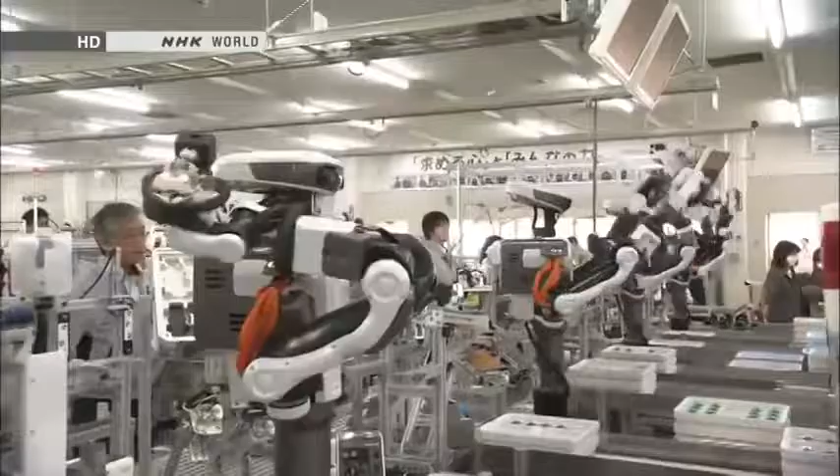At 8:30 one morning, a group of new employees takes part in daily morning exercises. They are 13 humanoid workers called NEXTAGE. This company began using the robots in earnest last year. They have 2 eyes and are just like humans. They're cute!

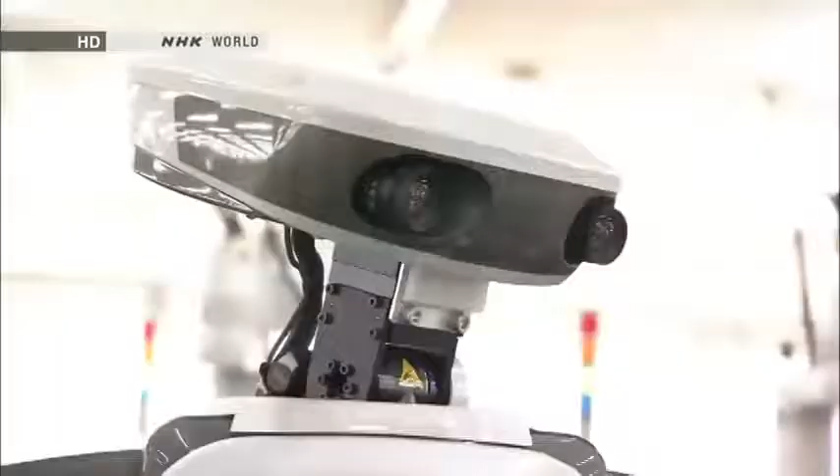This factory manufactures money sorting machines for cash registers. The humanoids work on a production line that was previously manned entirely by humans. The robot visually confirms the parts set in place by a human worker, then it begins its task.